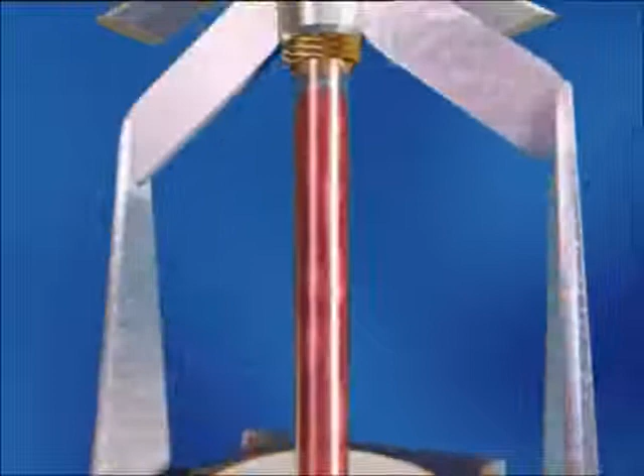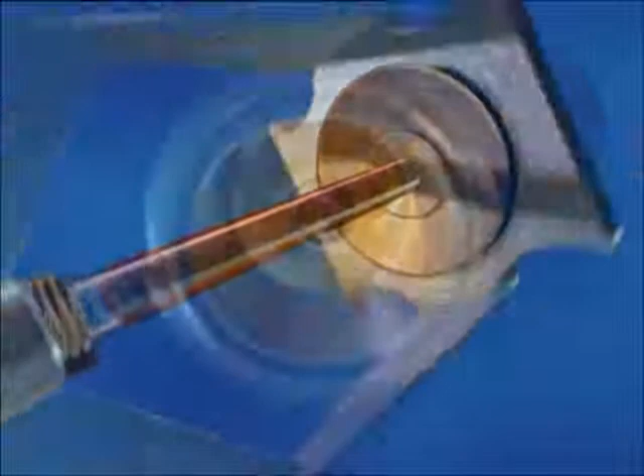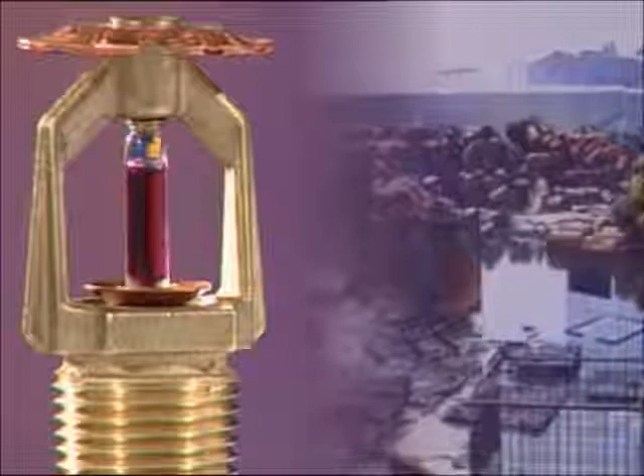Fire sprinkler systems were invented over 120 years ago. Since then, several hundred million sprinkler heads have been installed throughout the world. In that time, they've effectively protected thousands of buildings, helped to prevent the financial collapse of numerous businesses, saved countless lives, prevented innumerable burn injuries, and protected the environment from catastrophic fire-related pollution. They're universally acknowledged as the most effective first line of attack against fire.

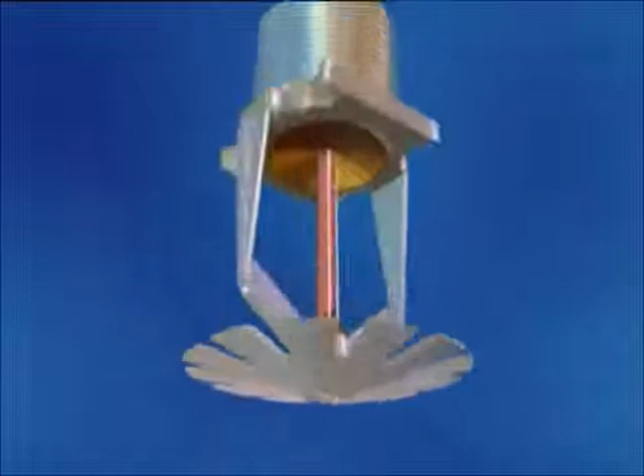The world's first rules for the design and installation of automatic fire sprinklers were written in the UK by John Wormald in 1885. Fire sprinkler systems in the UK are generally designed in accordance with British Standard 5306 Part 2 and, in some instances, Loss Prevention Council (LPC) rules for automatic sprinklers. American rules may sometimes be used, being Factory Mutual or National Fire Protection Association. Sprinklers are designed to cope with the fire risk presented by each individual building and may also be specifically configured to save lives.

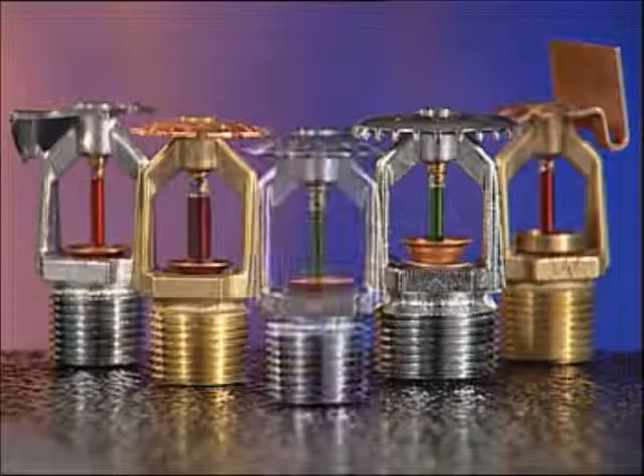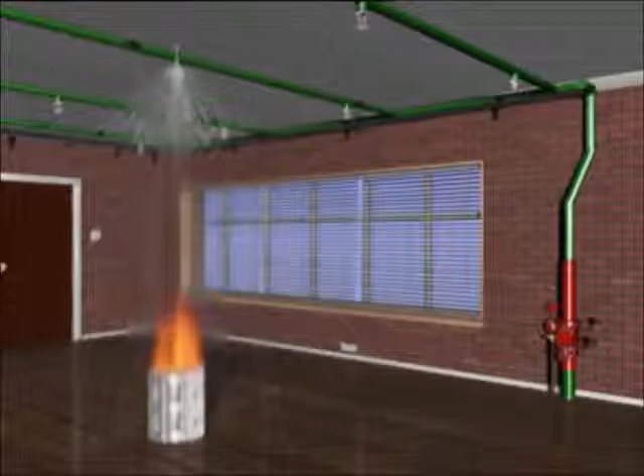Water still remains the most effective firefighting medium available. Sprinklers will deliver water right into the heart of a fire during its early stages through a specially designed sprinkler head. Sprinkler heads are unique. They automatically detect a fire, discharge water right into the seat of the blaze, and operate a local alarm. They can also operate a remote alarm to alert the fire brigade or other emergency centre.

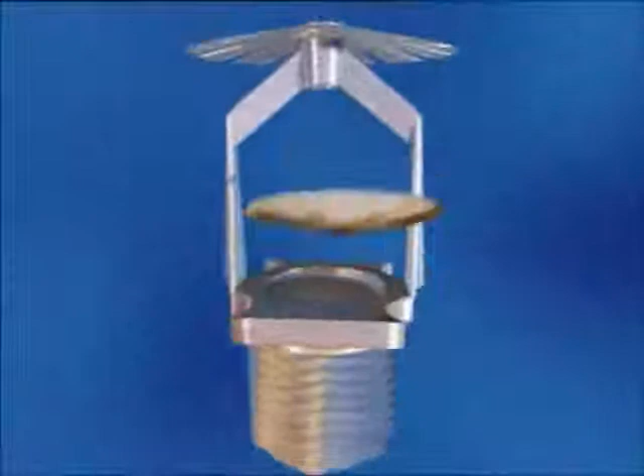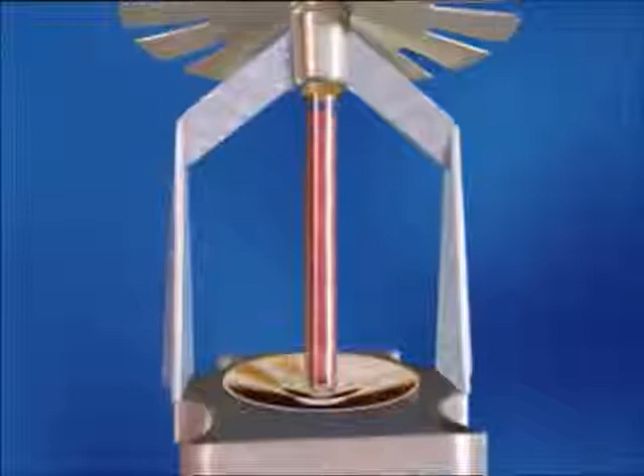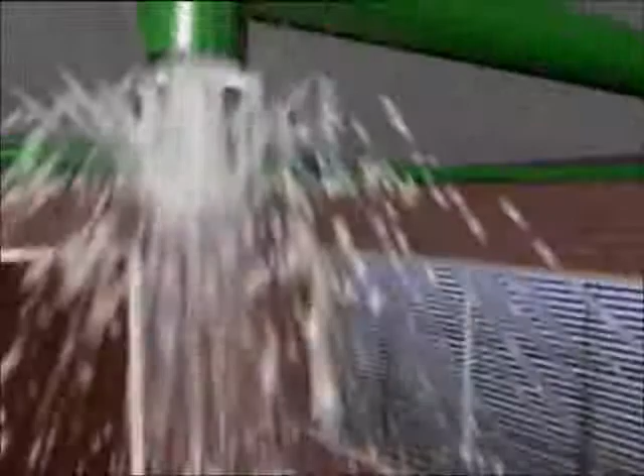A typical sprinkler head comprises a threaded body to connect to pipework, with a valve seal to hold back the water. The valve seal is retained by a glass bulb which contains a liquid that has a high coefficient of expansion. A small measured quantity of vapor remains trapped when the bulb is hermetically sealed. When the liquid expands under the influence of heat from a fire, pressure in the bulb rises until the vapor is compressed. Further increases in temperature cause a rapid build-up of pressure sufficient to shatter the bulb, releasing the valve seal and allowing the water to flow onto a water distribution deflector. This results in an even distribution of water droplets in a predetermined pattern over the fire.

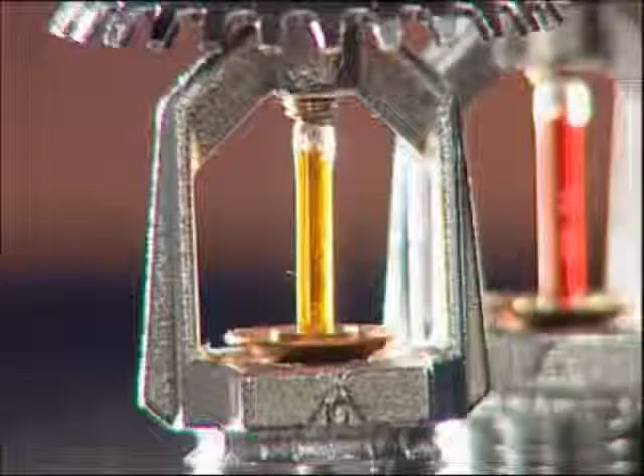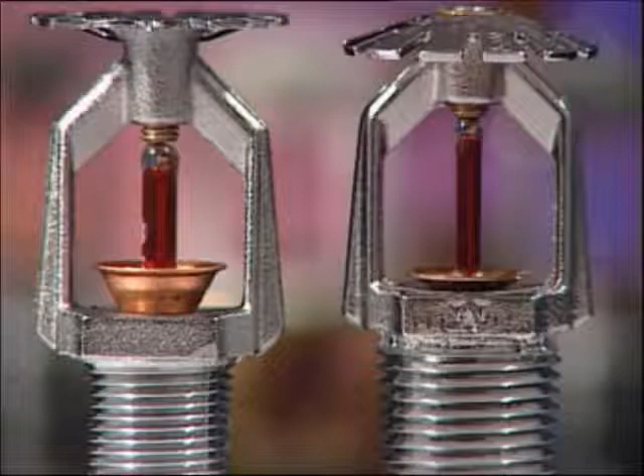Sprinkler heads are available in a variety of operating temperatures, which are identified by the color of the bulb. The specifier has a vast array of sprinkler heads available to him. Each type of head is designed to cope with different fire risks, different operating temperatures, and different operational requirements. The British Standard defines fire risks as light hazard, ordinary hazard, or extra high hazard. Generally, as the hazard increases, so does the water discharge or density discharge.

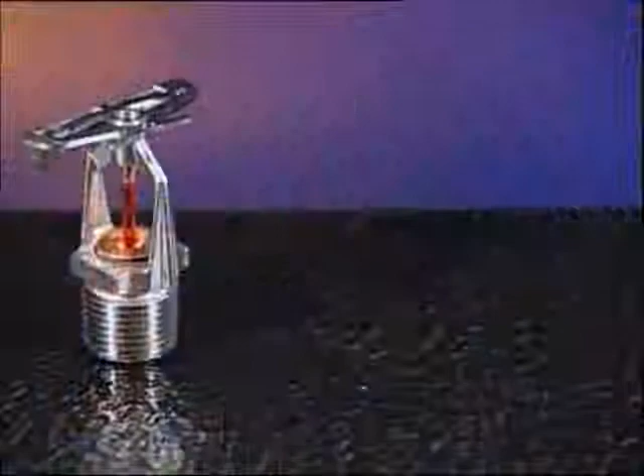Conventional sprinklers can be mounted in either the upright or pendant position, with a deflector designed to spray a proportion of the water discharged onto the surface of the ceiling. Spray sprinklers in upright or pendant positions are used for applications where all the water needs to be discharged downwards. Sidewall sprinklers are primarily used to keep ceilings clear of pipework for aesthetic reasons or to avoid having to disturb existing ceilings when installing. Each sprinkler protects up to 17 square meters in light hazard fire risks and 9 square meters in ordinary hazard fire risks.

Sidewall sprinklers with extended coverage are specifically designed to give an extended coverage of water distribution, with one sprinkler able to protect an area of up to 21 square meters. This type of sprinkler must have a quick response bulb. In a fire, few deaths result from direct contact with flames. The greatest threat comes from inhalation of the products of combustion, such as carbon monoxide, hydrogen cyanide, hydrogen chloride, other toxic gases, and the associated heat.

The reaction time of quick response sprinklers minimizes the life-threatening levels of toxic gases and temperatures. In many environments, there are people who cannot escape without assistance, such as in hospitals or homes for the elderly. Quick response sprinklers provide valuable time for those in charge to assist their escape.

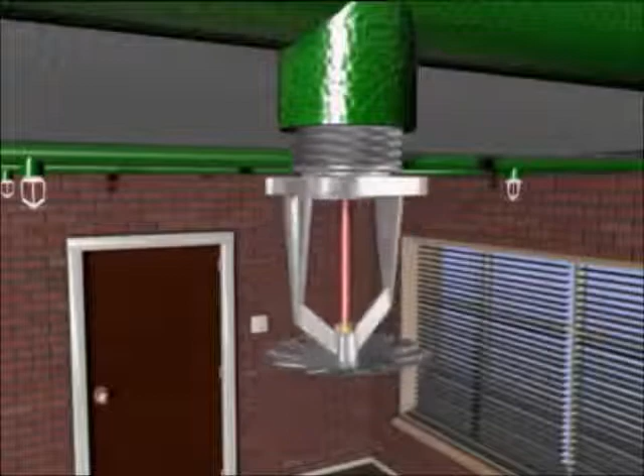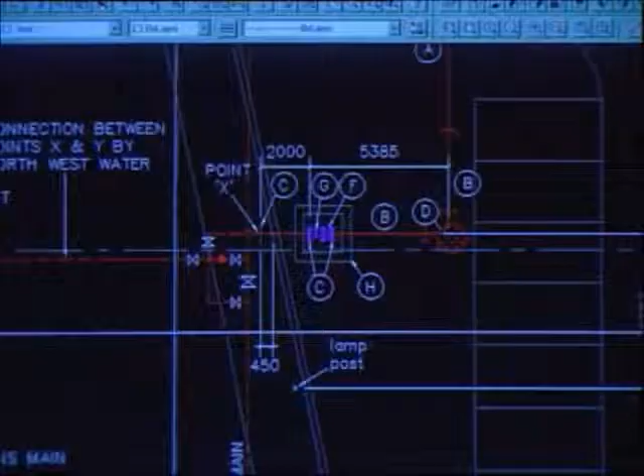A sprinkler head is connected to a water supply via a network of pipes fed throughout the building. The area protected by each sprinkler head can vary from 9 square meters to 21 square meters depending on the fire risk. The pipework is hydraulically designed to ensure the correct flow and pressure of water is maintained at each sprinkler head. The water supply to the system can be fed from the town main for light to medium fire risks, such as residential, offices, hotels, and light manufacturing and commercial occupancies. For high fire risk areas, such as heavy manufacturing and warehouse storage, a pumped supply from a water storage tank or reservoir is normally necessary.

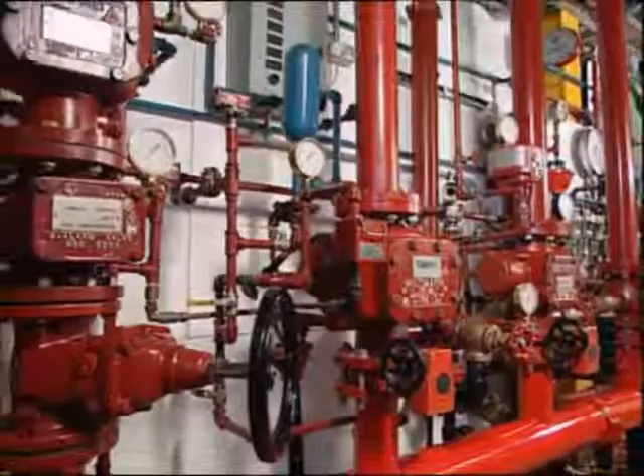The design requirements are specified in the British Standard BS 5306 Part 2 and LPC, FM or NFPA design rules. A control and alarm valve automatically delivers the flow of water to the sprinkler heads. There are generally 5 types of sprinkler system that all require different valve arrangements.

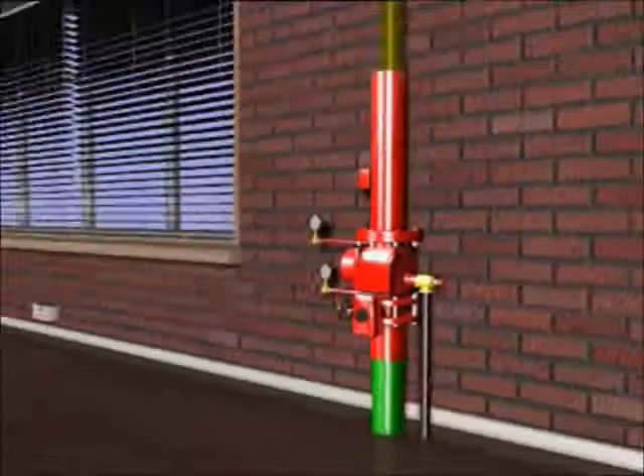A wet system is where the pipework is permanently charged with water and used to protect premises where temperatures are unlikely to fall below freezing point. Where the ambient temperature may fall or be below freezing point, the presence of static water in the sprinkler pipes is clearly undesirable. In this situation, a dry system can be installed in which the pipework is charged with compressed air. When a sprinkler operates, the compressed air is released and the control valve opens, allowing water to flow into the pipework and to discharge from the operated sprinkler heads.

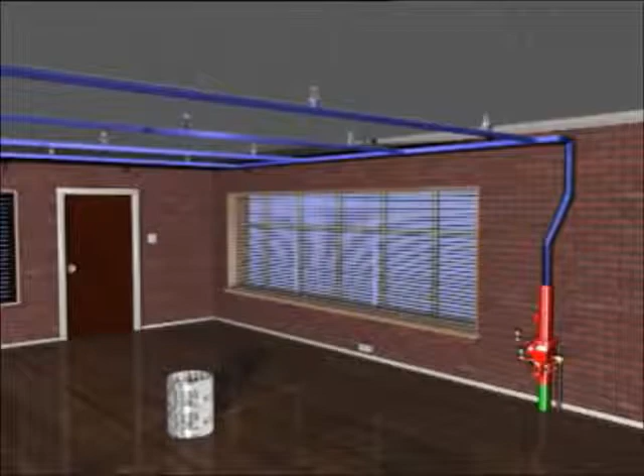An alternate wet and dry system, as the name implies, allows the system pipework to be alternately charged with water in summer and with air in winter, when there is a risk that the ambient room temperature can fall below freezing.

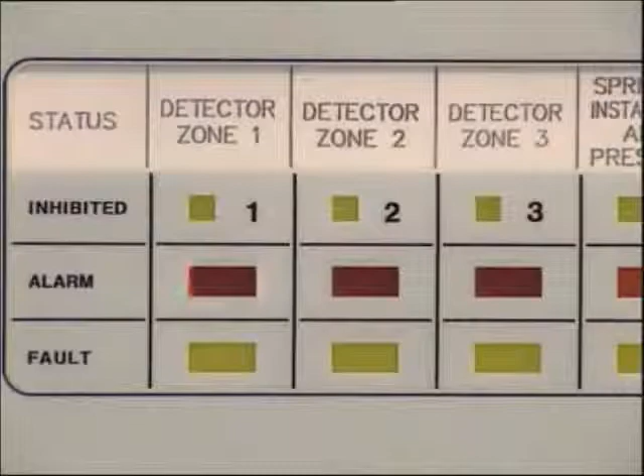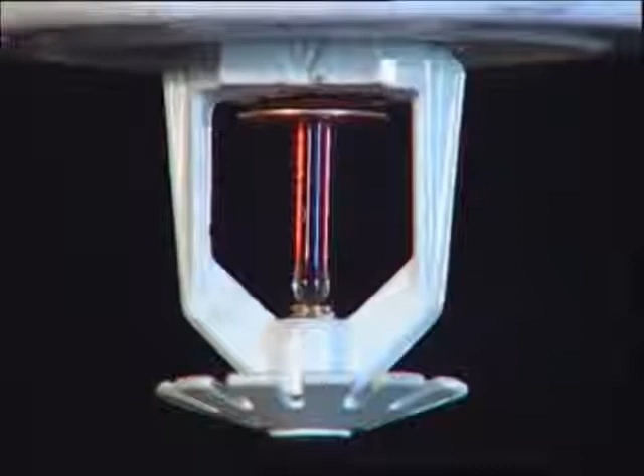Pre-action systems are comprised of a standard sprinkler system and an independent electrical system of heat or smoke detectors installed in the same areas as the sprinklers. On receipt of a signal from 2 or more detectors, the main control panel automatically opens the control valve, allowing water to flow into the sprinkler pipework. Water is only discharged when the individual sprinkler heads reach their operating temperature. Any physical damage to a sprinkler in a non-fire situation will not result in water discharge, but will cause both visual and audible alarms to be raised at the main control panel only.

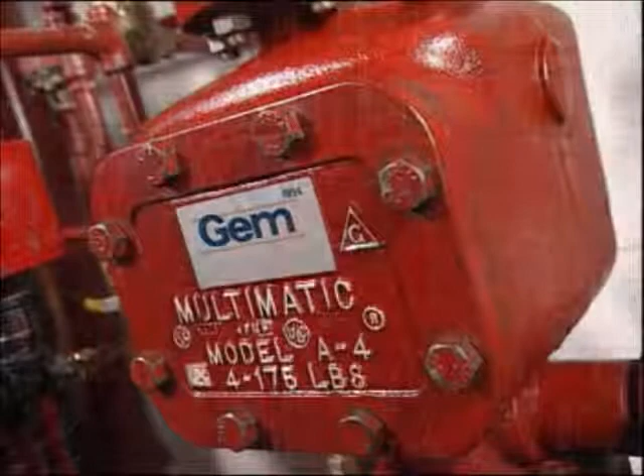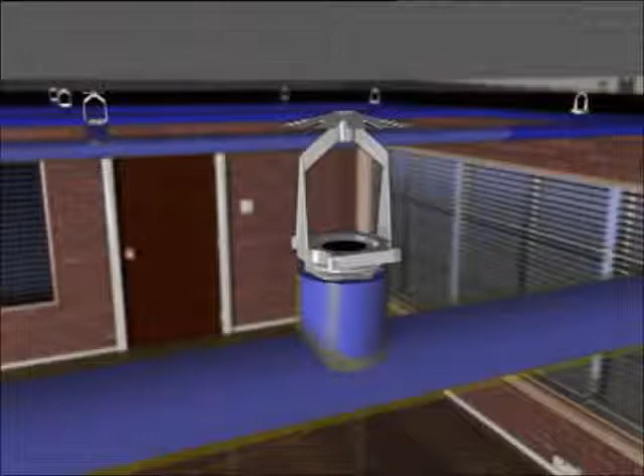A deluge system, unlike any other typical sprinkler system, is designed specifically for high-hazard applications with fast fire growth potential. The deluge valve is actuated by a separate detection system responding to a fire. This brings a large number of open sprinklers into action simultaneously throughout the protected area.

The successful performance of sprinkler systems has been detailed in records from across the world, paying testament to their outstanding reliability and effectiveness. In Australia and New Zealand, where it's a requirement that all fires must be reported, records reveal that over a 100-year period, sprinklers successfully controlled 99.5% of fires in sprinklered premises. Statistics collated in Europe over the last decade are remarkably similar, showing that in fully sprinklered premises, 99% of all fires have been controlled by the sprinkler system.

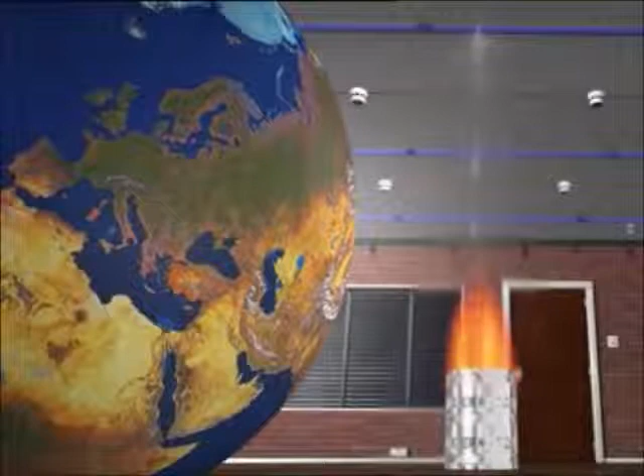The reason sprinklers are so effective is because they attack the seat of the fire before it has time to grow and spread. There's no excessive use of water. In Germany, for example, 86% of fires in sprinklered locations have been controlled by 5 or fewer heads. In the UK, it's reported that of the fires in sprinkler-protected buildings over a 10-year period, almost half were controlled by 1 or 2 sprinkler heads only.

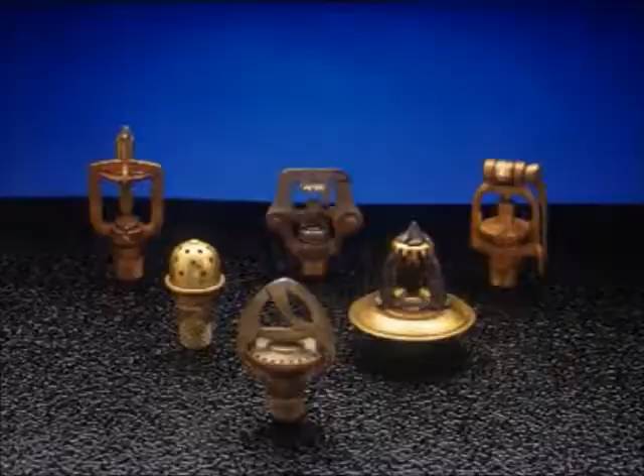Fire brigades, local government authorities and politicians alike have all seized upon these statistics. This has generated numerous campaigns for sprinklers to be installed in applications that could only ever have been dreamt about when sprinklers were first commercially launched over 120 years ago. That's because sprinklers are unique. They not only detect a fire and raise an alarm, they operate to control it and in many cases extinguish the fire before the arrival of the fire brigade. Only the sprinkler heads closest to the fire operate.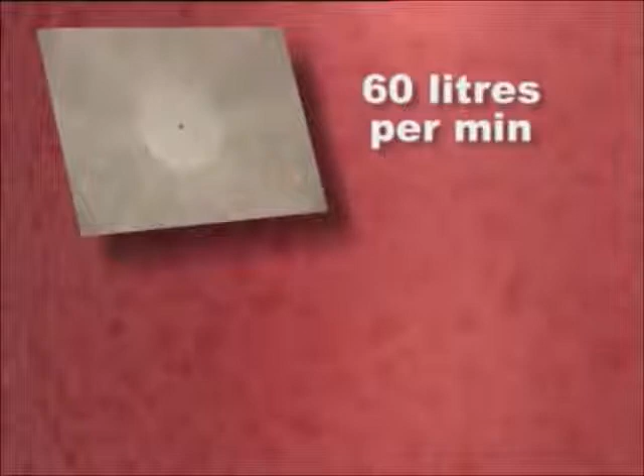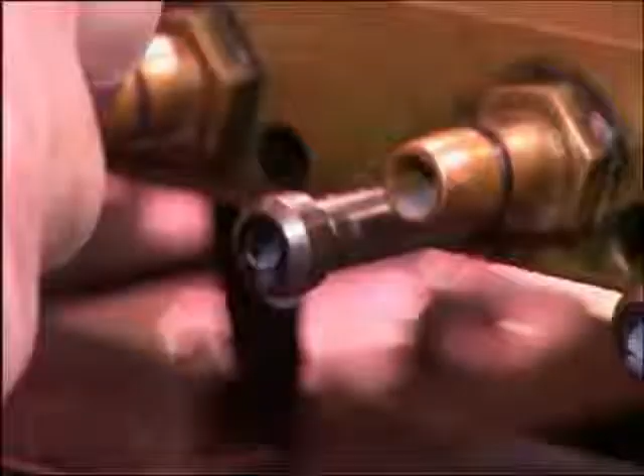Water is discharged by a sprinkler directly onto a fire at a rate of a minimum of 60 litres per minute, in comparison with an unsprinklered building where the fire brigade using only 1 fire hose could discharge 500 litres per minute. The fire will also be much larger as it will have grown for at least 10 minutes before the fire brigade arrive, so the likelihood is that more than one hose would be used. Worldwide research shows that of the 40 million sprinklers installed every year, only 2 may operate accidentally. This is because every head is individually tested before leaving the manufacturer.

Sprinklers are economical to install. For example, in the case of office blocks and hotels, the sprinkler system would cost about the same to install as a quality carpet for the equivalent area. Sprinkler systems will have a lifespan of at least 25 years, probably 50 years. Some systems are still in use today that are over 120 years old.

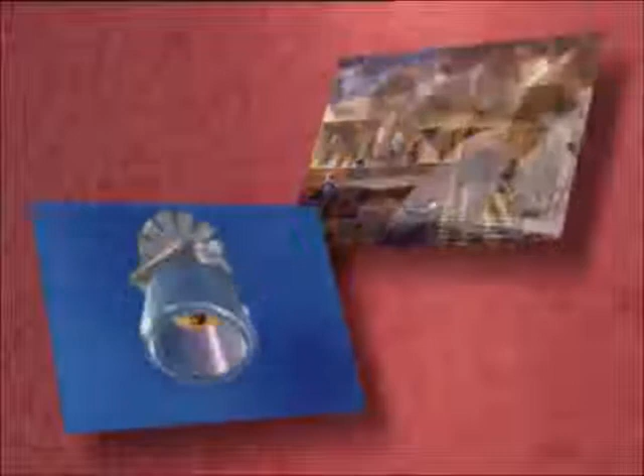The threat from fire will never change. It will always be with us, endangering life, property, and the environment we live in. Fire sprinklers will protect us and future generations. Fire sprinklers. Protection for life.